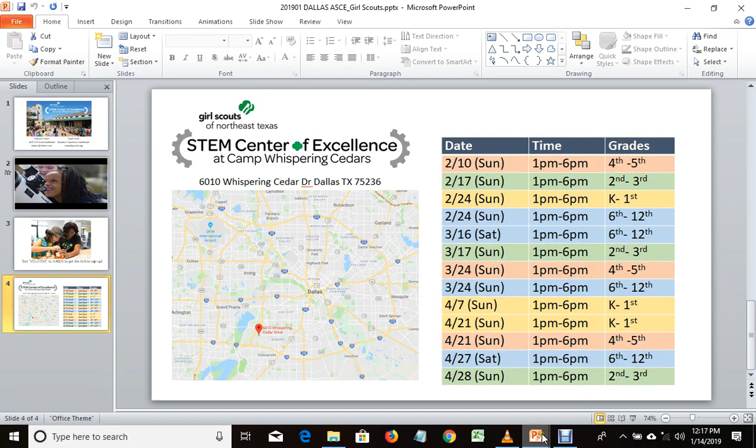To see me after the meeting, I'll get her to come over to your house.

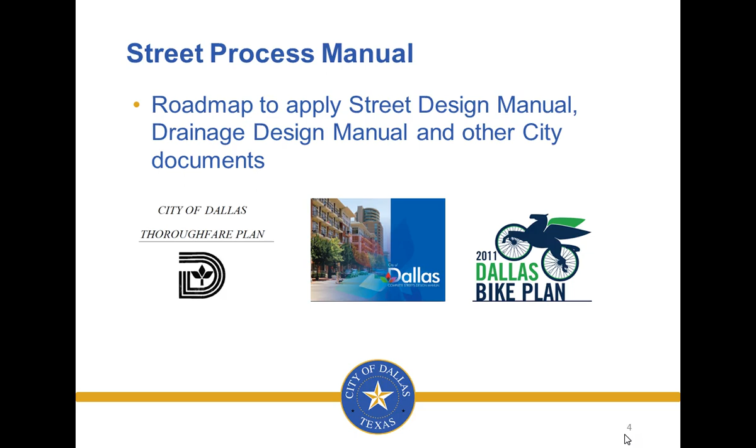Our street process manual is one of our biggest changes. We have a completely new manual for this. It's basically a roadmap to the application of some of our other manuals, like the street design manual, the drainage design manual, and other documents listed here, like the thoroughfare plan, our bike plan, and those types of things.

Most of our projects actually have involvement with numerous city departments through the planning, design, and construction phases. The street process manual provides a summary of the various departments and what they do. It's a guide for the planning design process. It defines the goals, talks about what to consider in your project, and which departments are involved.

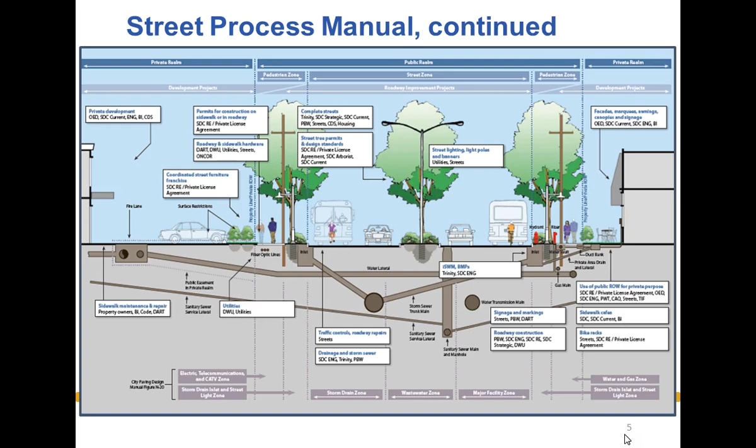Also, as part of the street process manual, we have a development form, and this captures project information. It documents the key decisions made throughout the projects, and it's updated with each submittal. That's part of this street process manual, and it's one of the things we hope is really going to help with projects and making them a little bit easier.

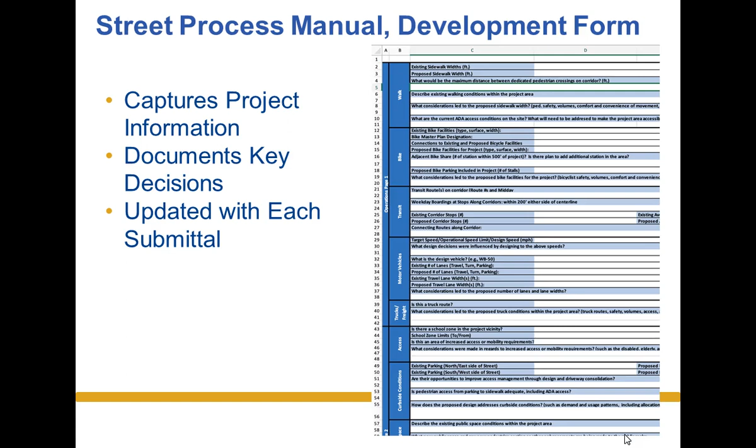The second manual is our new street design manual, and it replaces the paving design manual. We've updated the name, because calling it a paving design manual implies that the manual is only talking about pavement, and it's really not. It's incorporating our entire process.

It includes complete streets guiding principles. It incorporates Envision design principles, which foster economic, social, and environmental aspects of the projects. It has 5 major credit categories shown here, and it really just encourages looking at the project as a whole and how the proposed project will truly contribute to conditions of sustainability. Sustainability is a big thing that we're really looking at in all of our projects.

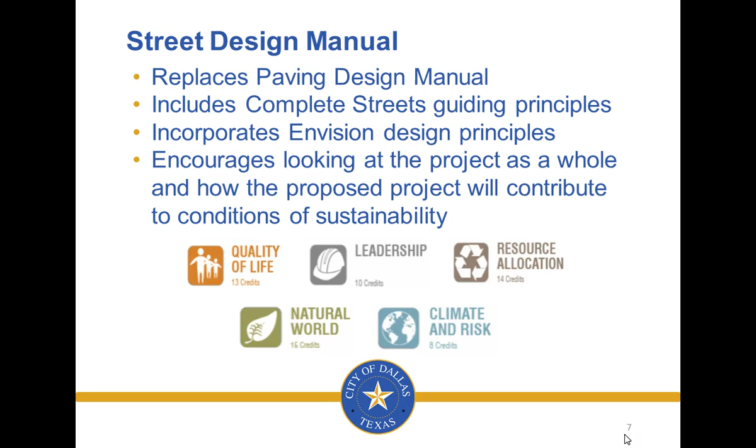Another big thing with the manual is looking at contextual street types, as defined in the Complete Streets Manual, based on land use and the surrounding context. It's used in addition to functional types. There are 6 types listed here, and you can see how those work in conjunction with the functional classification.

I don't really want to get into a lot of detail here, but I just want to show you some of the main things that are in the manual and some of those new things you're going to be seeing.

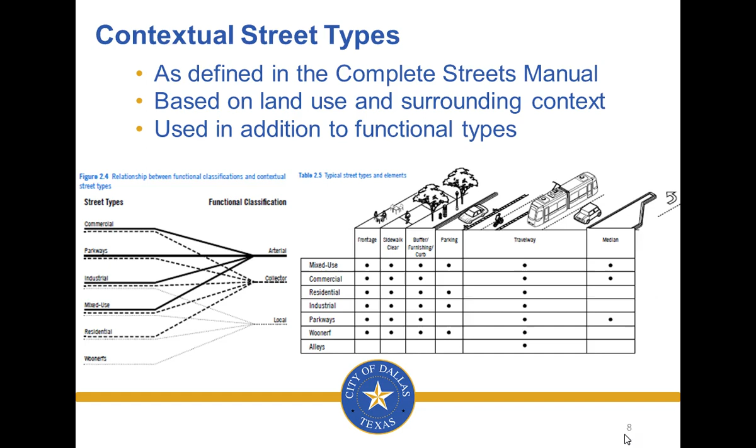The street design manual also looks at the roadway in 3 zones. The first is the pedestrian zone, the area between the street and the building face. It's the essential path that gets pedestrians from one place to another, but it's also where people exit their parked cars, park their bikes, and wait for buses. So we have to look at where to put street furniture, where to put bollards, and how people handle recycling and garbage. We're really looking at these areas in much more detail.

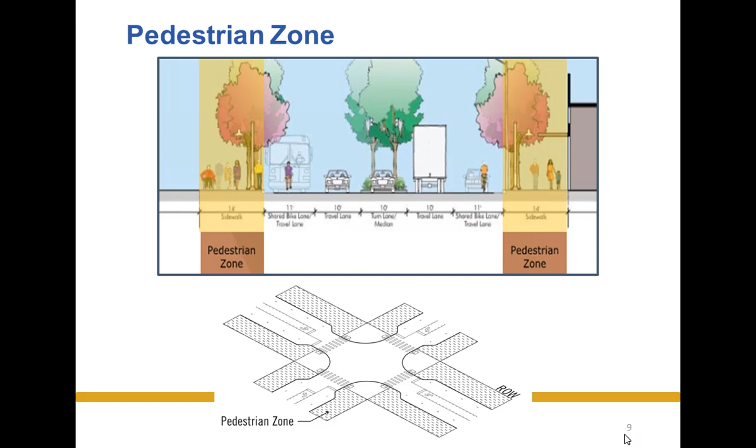The second zone is the street zone, between the curbs. Traditionally, at first glance, it has one function, which has always been to move the cars. But we need to start looking at how we incorporate transit riders, how we incorporate bicyclists, looking at this in a much more comprehensive manner—our street lighting, paving treatments, loading zones. How do we incorporate all that into this street zone?

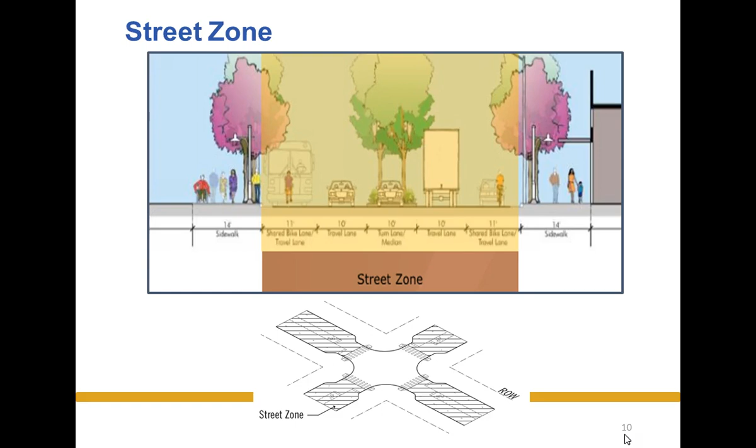The third and final zone is the intersection zone. This is really where all modes of transportation and movement in multiple directions have to share that space. So again, we have to adopt a multimodal approach, not just look at that vehicular zone.

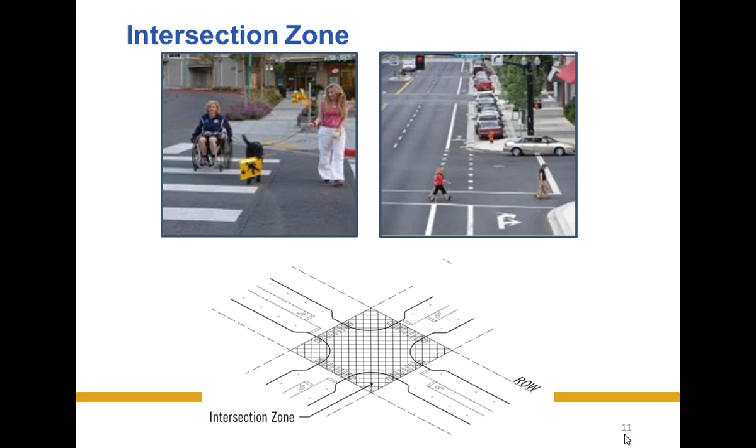We also are looking at design and control vehicles as part of the manual. The design vehicle is that which is accommodated within the traffic lanes, and the control vehicle may intrude into other lanes. So it shows an example here of passenger cars, which is the design vehicle, and some of those control vehicles are larger trucks, which actually go out into other lanes. Usual design vehicles for most streets are passenger cars, single unit trucks, and intermediate semi-trailers. For arterials and collectors, those usually need to accommodate interstate semi-trailers.

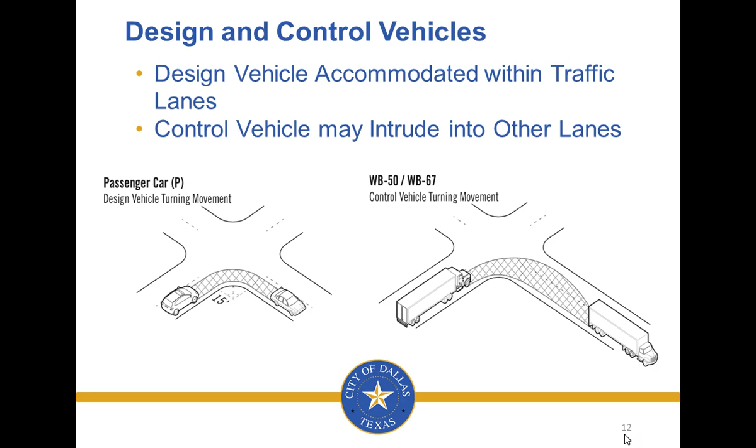One of the big differences is target speed. That replaces design speed as the primary control for determining geometrics of streets. It is based on the street functional classification, the street type and context, and the ground floor land use characteristics along the right-of-way. Using the target speed approach, the desired traffic speed is determined before the design of a project starts, and the roadway is designed to encourage drivers to move at that speed. This is one of the big differences in how we're actually approaching the design of the roadway.

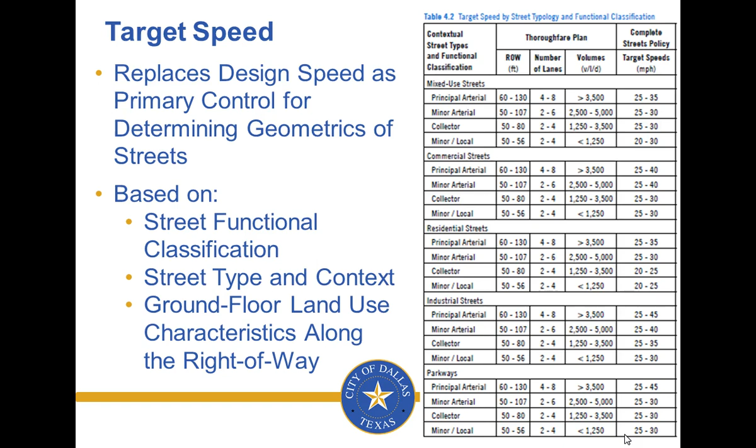Bicycle facilities are also covered in the manual. It gives standards for on-street and off-street bike lanes, for shared and protected bike lanes, and shared pedestrian and bike paths, and how we're going to handle intersection treatments. A lot of that is carrying those bike lanes through the intersections and making sure we take care of our bike riders. Everything is focusing very much on the multimodal approach and making sure that we're taking care of everybody on our roadways.

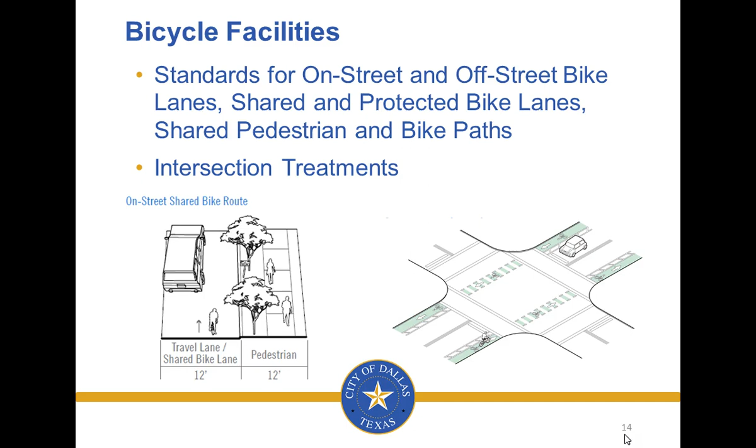Looking at dimensions, we're also providing minimum, preferred, and maximum values for our street zones and elements, based on the contextual street type and street classification. This should make it much easier to work within limited right-of-way. The example table here is given for pedestrian zones, and you can see it also talks about the frontage zone and gives the sidewalk clear zone, and the buffer and furnishing curb zone as well.

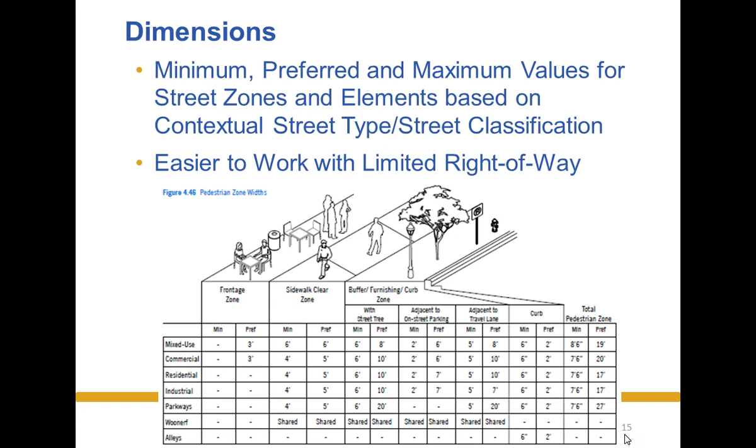For landscape standards, it gives standard requirements for trees and planting areas in the streets, with different requirements for different stature trees, whether large, medium, or short ornamental. You can also see an example here about the tree root zone, which gives different dimensions for that tree root. There's a lot of detail in these manuals that you may not have seen in previous manuals.

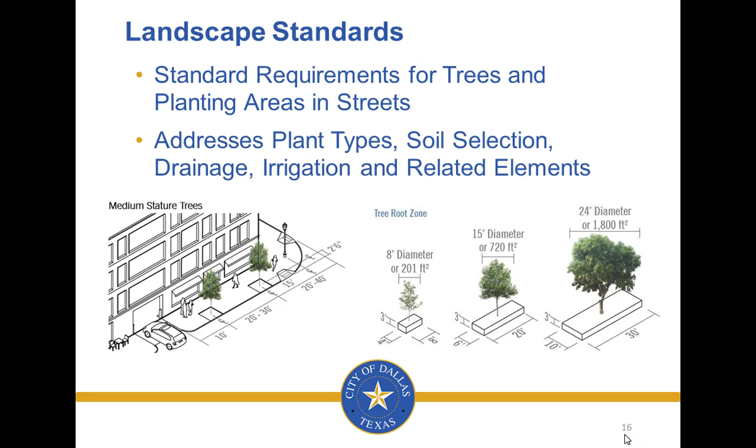For street furniture standards, we have standard requirements for the siting of benches, bike racks, bus stops, trash cans, etc. You can see some examples here. Most of the above ground elements in the pedestrian zones should be placed in the buffer, furnishing, and curb zone, and we have to make sure that we allow for ADA and Texas Accessibility Standards compliance in those.

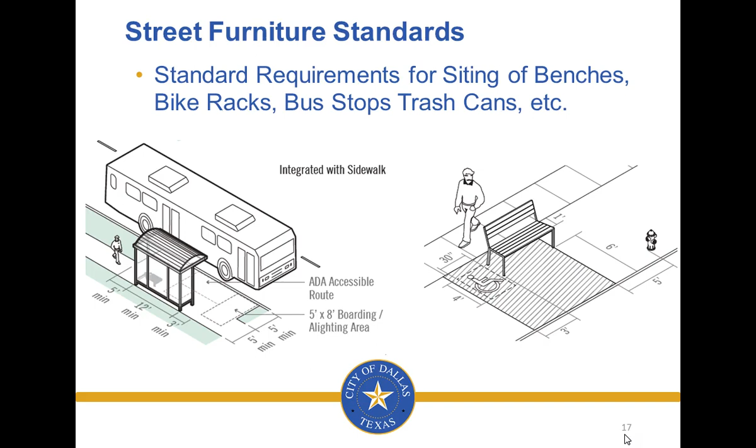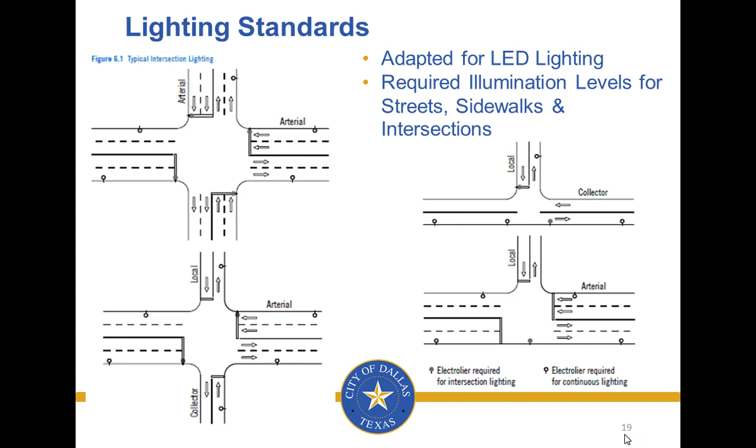The lighting standards have been adapted for LED lighting, which is the new city requirement. The required illumination levels are provided for streets, sidewalks, and intersections, and this is an example of a figure which gives typical locations for street lighting at intersections.

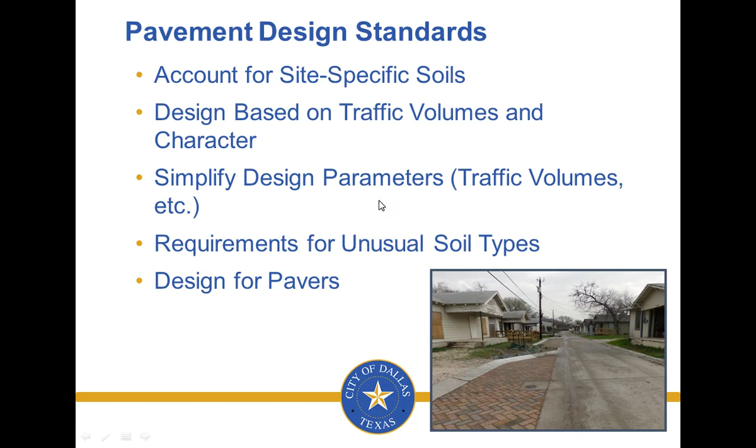Okay, technical difficulty there. Evidently, we don't want to talk about the drainage design manual. There we go. Thank you. There we go.

Moving on to our drainage design manual, it's been updated to reflect a lot of our current engineering practices. As I mentioned, many of our models, applications, and even the basic guiding regulatory criteria governing drainage design have been updated since 1993, which was when our last manual was published, and our design criteria have been updated to reflect these changes.

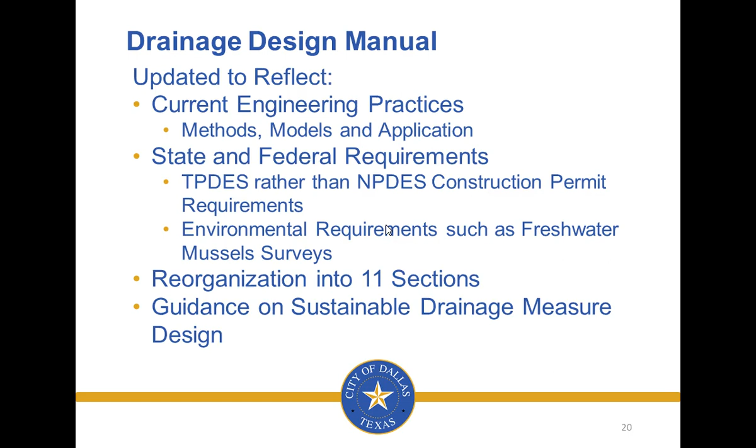The EPA delegated the Clean Water Act responsibility to the state of Texas through the Texas Commission on Environmental Quality, so the criteria related to permitting has been updated to reflect that change through the use of the Texas Pollutant Discharge Elimination System construction permit requirements instead of the NPDES requirements. There are also requirements to address stream buffers and state and federal endangered and listed species. We've reorganized the manual into 11 different sections, and we provided guidance on sustainable drainage measure design.

When I'm advancing, this thing's turning off on me. There we go. Thanks.

Our updated methodologies are incorporating standardized, regionally implemented integrated stormwater management program measures that were previously adopted as voluntary with minimum project size limitations and lengthy checklists to complete to certify that the project was using iSWM. The assessment of development impacts on the existing drainage system was previously required but not routinely performed. Because redevelopment is occurring in Dallas, this step in the normal design process becomes more critical, and it's also included in the new drainage design manual.

The overall thought process is to incorporate more sustainable design measures as additional tools in the design toolbox on all sites and projects as part of the standard process where practicable, rather than as a separate process.

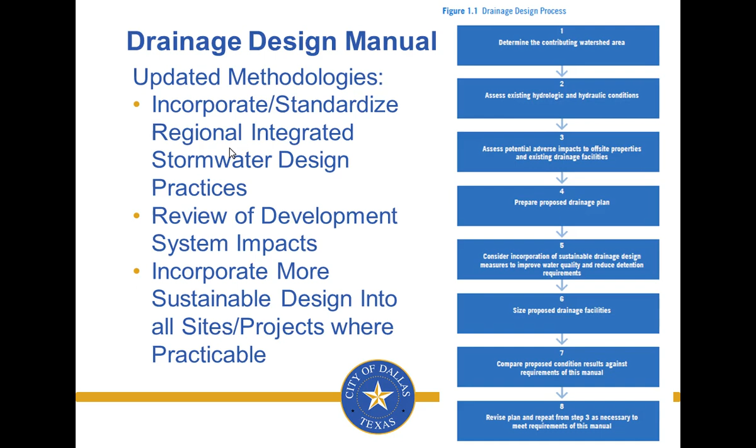I'm going to hit this one more time and hope this thing doesn't turn off on us. Here we go.

For design storms and criteria, all systems must be designed to accommodate the 1% annual exceedance probability storm. And I'm going to say AEP from now on because that is a tongue twister. Detention must regulate the 1%, 2%, 10%, and 50% storms. So these are some of the tables that you will see in the manual relating to that.

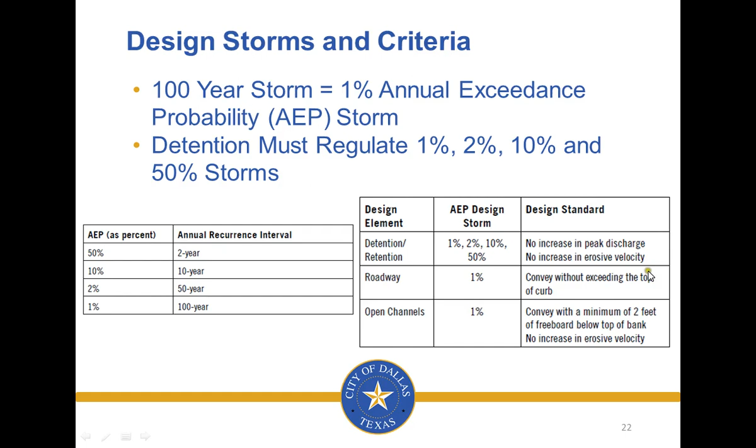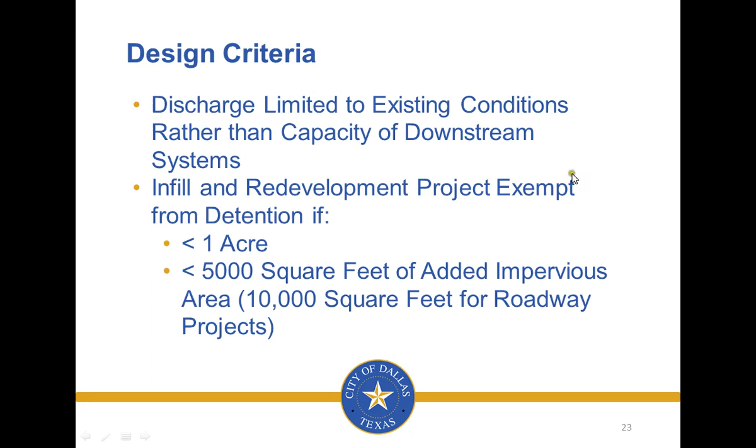And some more design criteria. The discharge is going to be limited to existing conditions rather than capacity of downstream systems. And infill and redevelopment projects are exempt from detention if they are less than 1 acre, or if less than 5,000 square feet of added impervious area, or less than 10,000 square feet for roadway projects are being added.

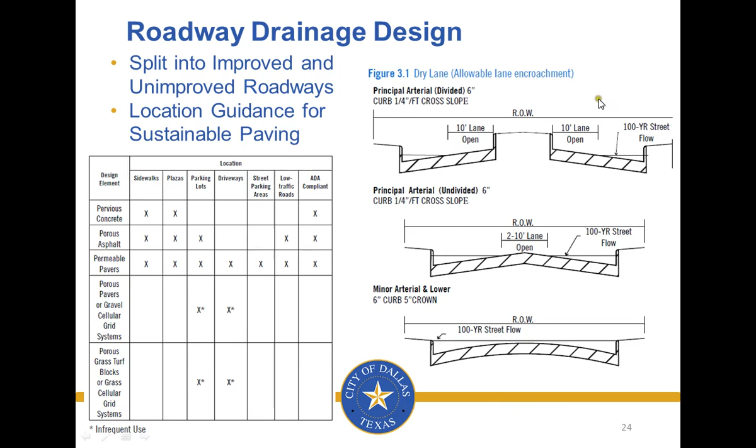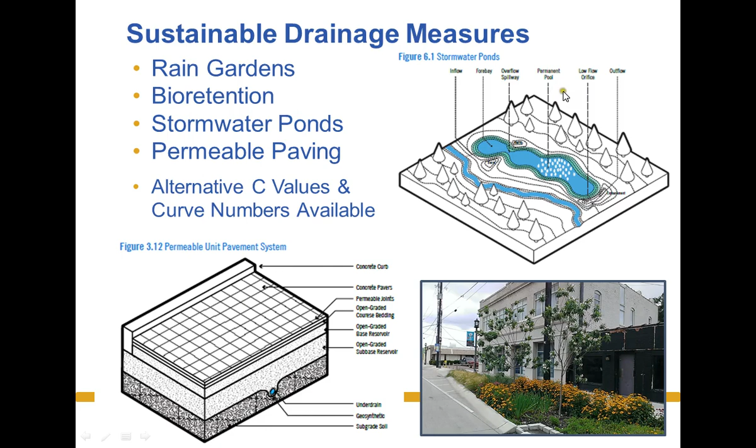There are many types of sustainable drainage measures that are discussed depending on site conditions. We have examples of rain gardens, bioretention, stormwater ponds, and permeable paving. And alternative C values and curve numbers are available in the manual. And again, some additional sustainable drainage measures are listed here as well. Again, a lot of different examples are given in the manual.

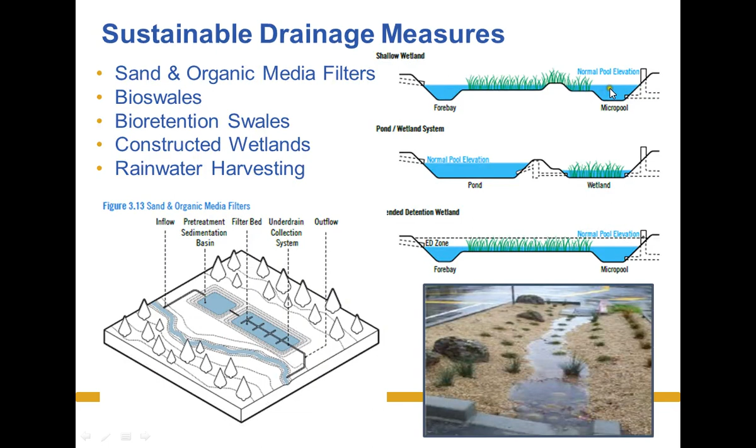And all projects should be designed so that erosion is minimized. Creek bank erosion and sedimentation are natural processes that can be aggravated by human causes. So natural channel setbacks prevent damage from large flood events and preserve natural riparian habitats and should be included in the drainage easement for channels. So there are graphics and things in the manual to talk about that.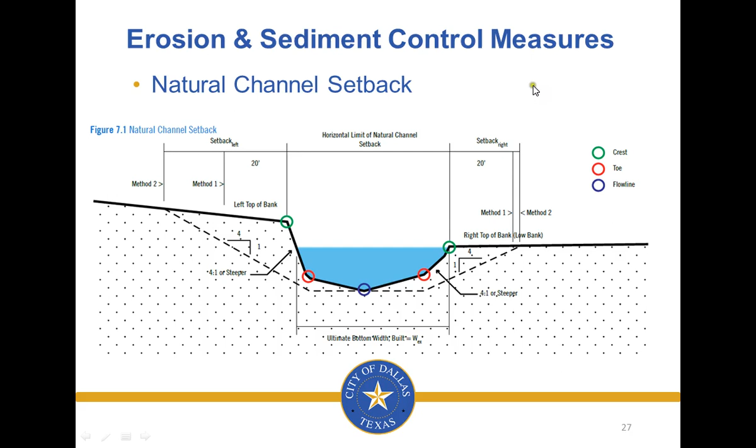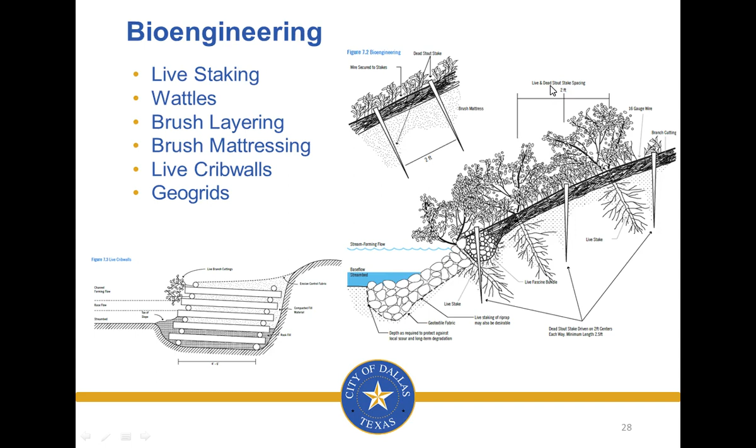And in addition, bioengineering methods can be used instead of rock armoring structural methods in appropriate scenarios for permanent erosion control. Some examples include live staking, wattles, brush layering, brush mattressing, live crib walls, and geogrids. However, they should only be used in channels where the methods can withstand high flow velocities.

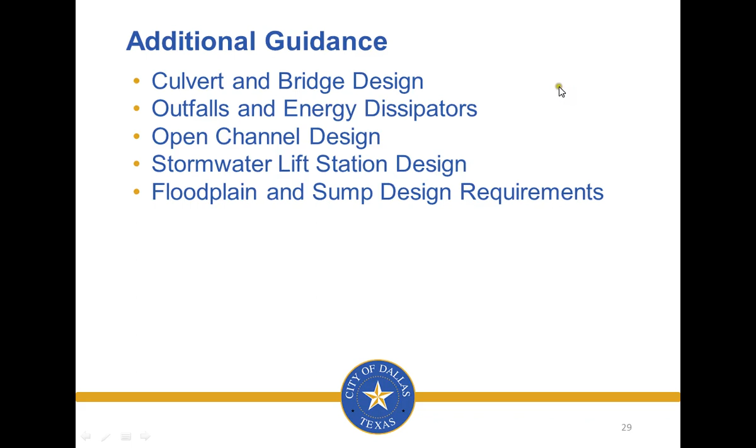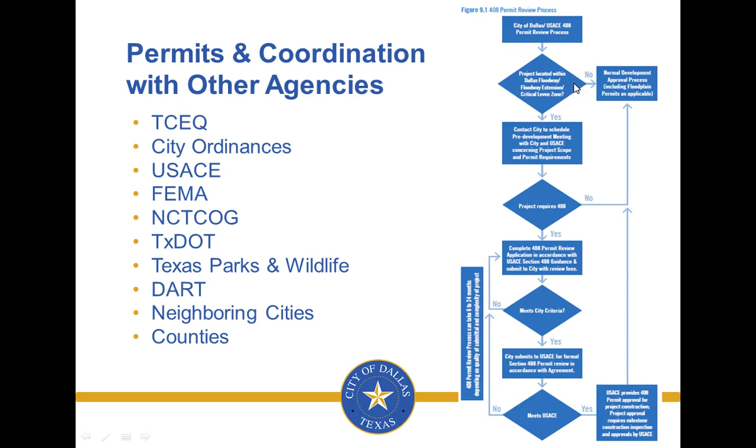And additional guidance is also provided for our culvert and bridge design, outfalls and energy dissipators, open channel design, stormwater lift station design, floodplain, and sump design requirements. As you're all aware, the projects must meet requirements of other regulatory agencies to receive city approval. So this is just a list of various agencies that must be coordinated with depending on the scope of the project.

From a schedule standpoint, where we're at with this project, we are looking to finalize all the manuals this month and next. We're doing outreach to the professional and technical community at meetings such as this, January and February. We're looking for council adoption this spring, and then also staff training in the spring. So we are looking to implement these manuals and move forward with the 2017 bond program using the new manuals. And with that, I'm going to turn it over to Rick to talk about the 2017 bond program.

Again, Rick Galceran, so happy to be here and address you all. When I first came here, I thought nobody would know what the bond program was really about, so I could kind of fake news my way through this. Unfortunately, my two previous bosses are here, so I'm going to have to keep things more truthful.

For the sake of those that may not understand what a capital improvement bond program is, in particular for a city, let me just give a little 101. Cities generate their revenues by taxes, and on an everyday basis, they may pay electrical bills and fix windows and clean floors and so on, and that is generated through the general fund. Those are everyday taxes.

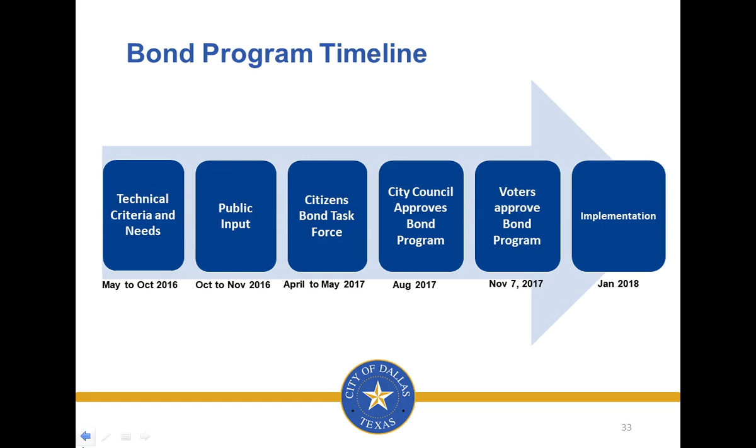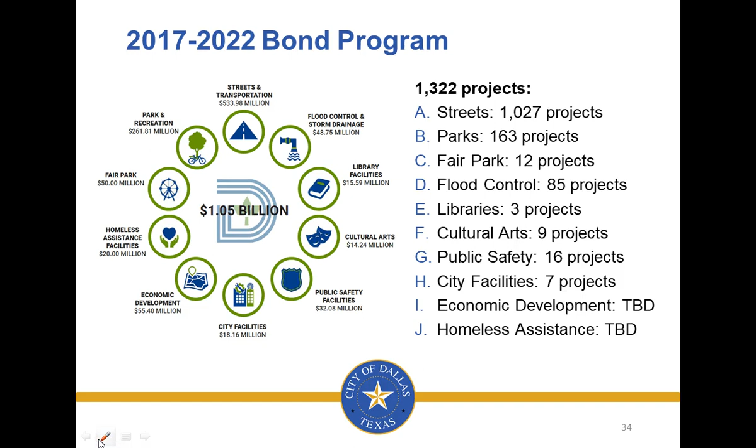This is a synopsis of what this 2017 bond program is consisting of. There's 10 propositions. For those of you that are, like myself, old school, we used to have propositions based on 1, 2, 3, and so on, but the state decided that they were going to use that numbering system and allow the cities to use the A, B, and C. So a little bit about Proposition A, which is streets and transportation. A little bit over $500 million just for that. Over 1,000 projects. Anything from traffic signals, sidewalk replacements, fixing critical bridges, major thoroughfares, and so on.

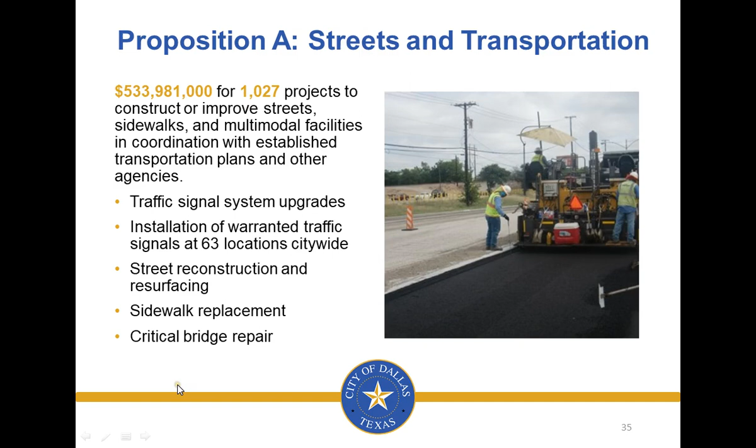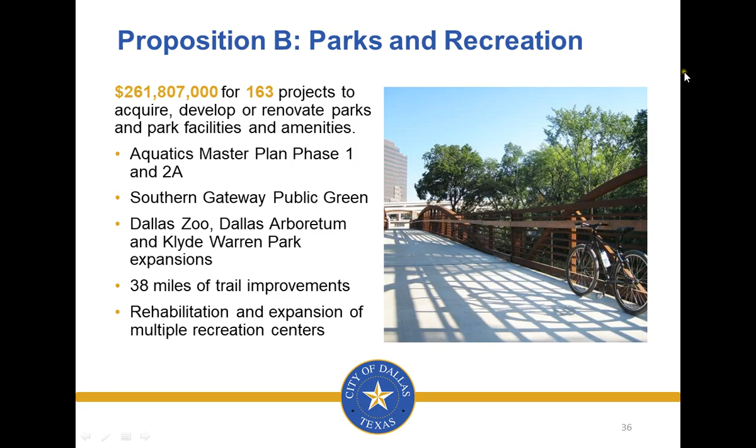And this is a unique one, Proposition C, that's dedicated just to Fair Park. 12 historic buildings. You know, just a little bit of information, when we think about Fair Park, we're always thinking, well, why doesn't the city just upkeep it like they're supposed to, right? Well, keep in mind how long ago the State Fair came to Texas, and a lot of those facilities were constructed then in support of the State Fair. And more importantly, some of them may have not been constructed in a way that they were going to last very long. They were thinking one state fair.

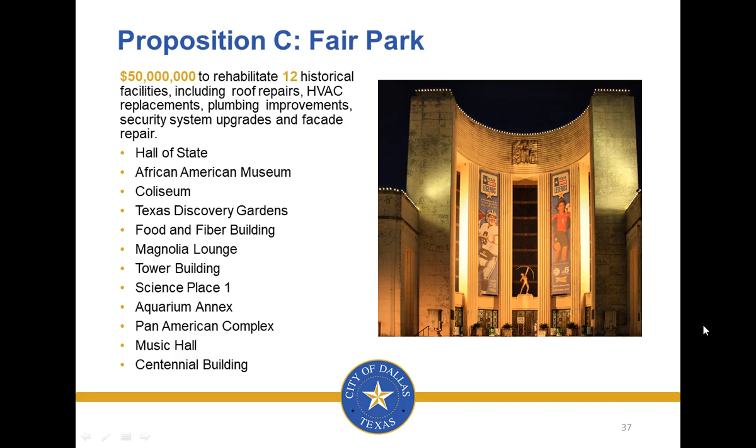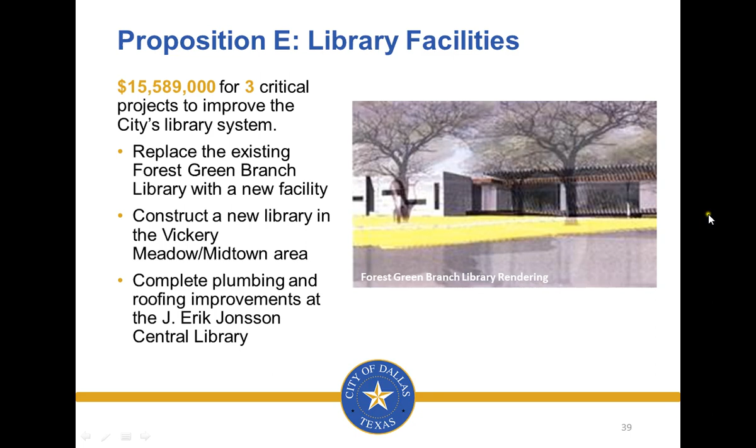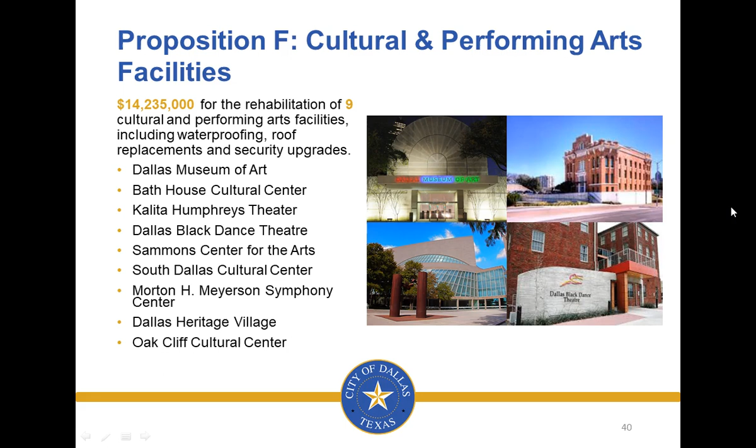Proposition F, we have many cultural facilities throughout the city, and this is some of the work that we have to do on roofs and HVAC systems and security upgrades. Too many of those. Proposition G, public safety. We are also adding some security upgrades, and most of this work is actually already done, to a lot of the substations and the Jack Evans Police Headquarters. But there's also a new fire station, the replacement of 36 and 46, interior renovations, and so on.

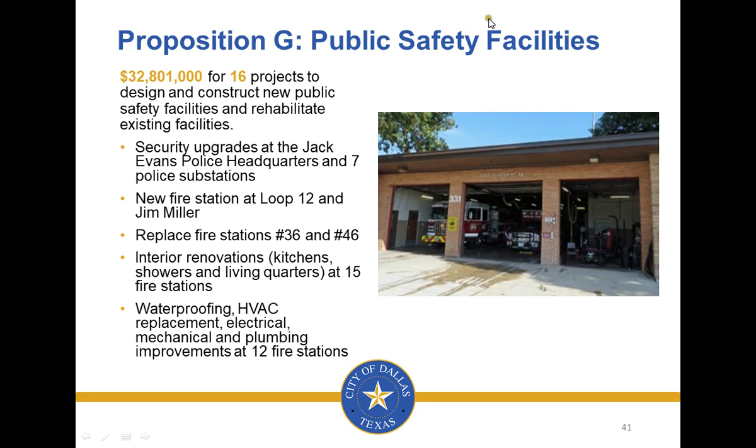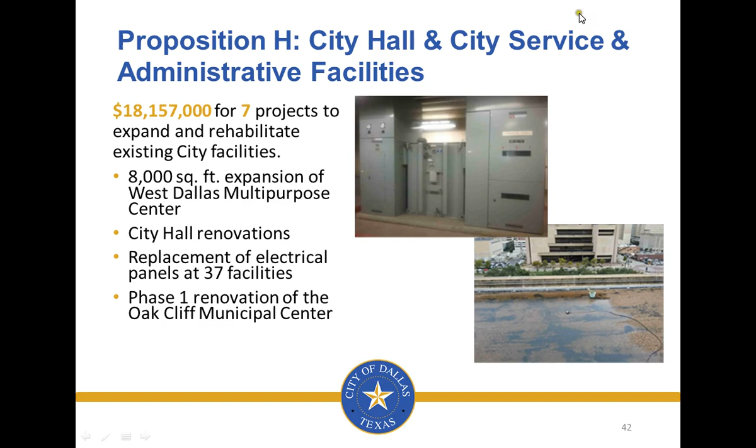City Hall and administrative facilities. The hardest thing to do is to convince our council and the citizens that the city employees should have facilities that are adequate for a work environment. And this was addressed. This is a great win for the workers, for people that make their living there at the city's facilities. 37 facilities in all, and again, a lot of it, if not expansion, upgrades.

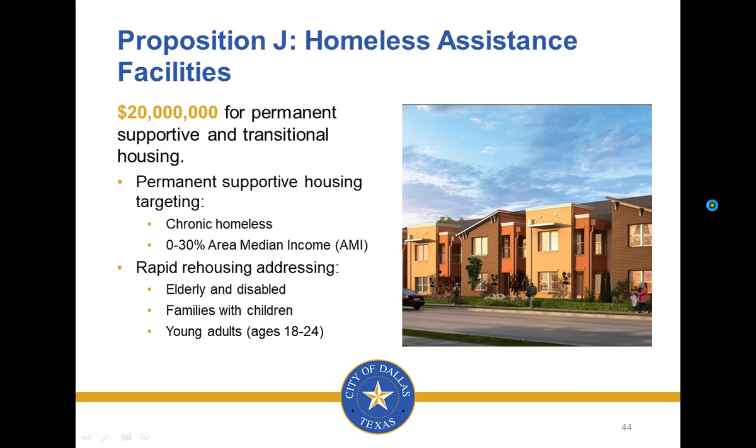So now the nitty-gritty. So what's so different? I addressed this same group 1 year ago. I'm sure you remember all the details of which I spoke on. But there are some differences. So the objective of this bond program, or rather the mandate, is that we get everything implemented in 5 years.

We've got projects that are still from the 2003, 06, and then 12 bond program. And so in this case, the directive was to try to get this all done. Keeping that in mind, there was a creation of a bond office.

My boss came up to me and said, "Rick, you got 2 choices. You could stay in Public Works and run that, or you can be the director for the bond office. Oh, and by the way, I want you to be the director of the bond office." And so here I am doing that.

Again, primary responsibilities: implement in 5 years, and also get all those previous bond programs completed. Another unique area is the use of a program manager to help us implement those projects as well. So why was it necessary? Track and account for the funding. Where is the money going?

Keep in mind, in the past, the citizens would vote, and so each of the delivery departments, whether it be parks, public works, in this case transportation, the drainage folks, the people that did the facilities, knew that they had this funding. We would work with each other to make sure that there was going to be funding enough that year to implement. And then there was an oversight, but not a demand that you've got 5 years to do this. And so this is different now.